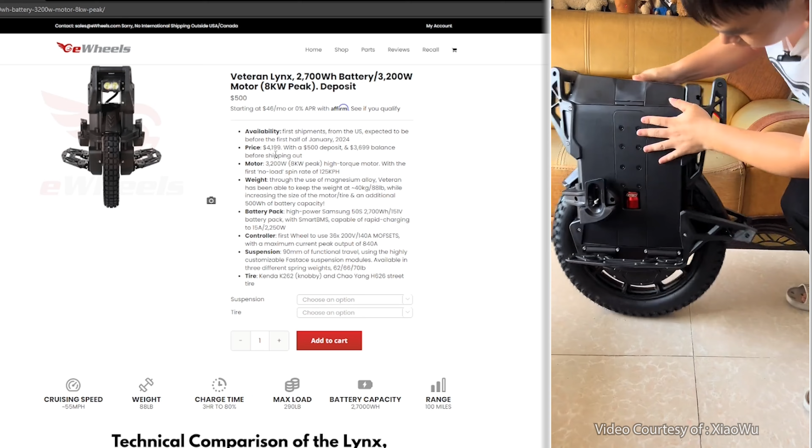So it's the Veteran Lynx. It has a 2,700 watt-hour battery, 3,200 watt motor. It's going to be available January 2024, which is only 2 months away. Price $4,200. That is a little pricey, but let's see what it has to offer. Maybe we can make that make sense.

The motor is 3,200 watt, high torque motor. So it doesn't say high speed motor, but with 3,200 watts, I guess high torque is high speed, right?

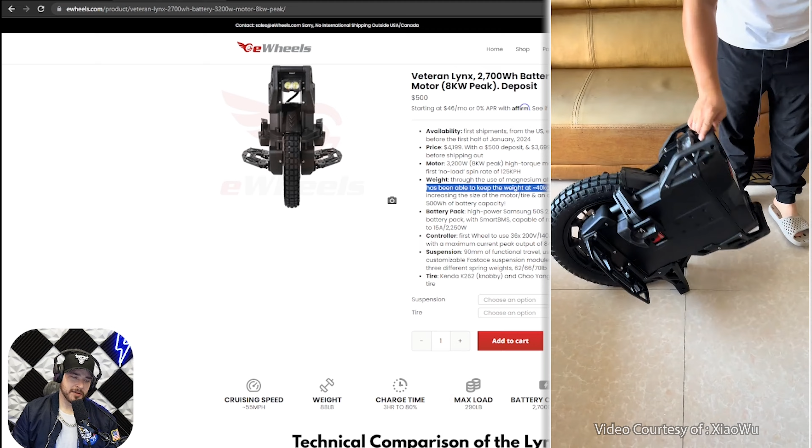The weight - through the use of magnesium alloy, Veteran has been able to keep the weight at 88 pounds. Oh, that's not bad. Whoa, is this a jumping wheel? You know what I'm saying? We got to get one to Mike Leahy and figure it out.

Battery pack - high power Samsung 50S. Yo, these 50S batteries are all the rage, so I'm glad to see it does have a 50S battery coming with it.

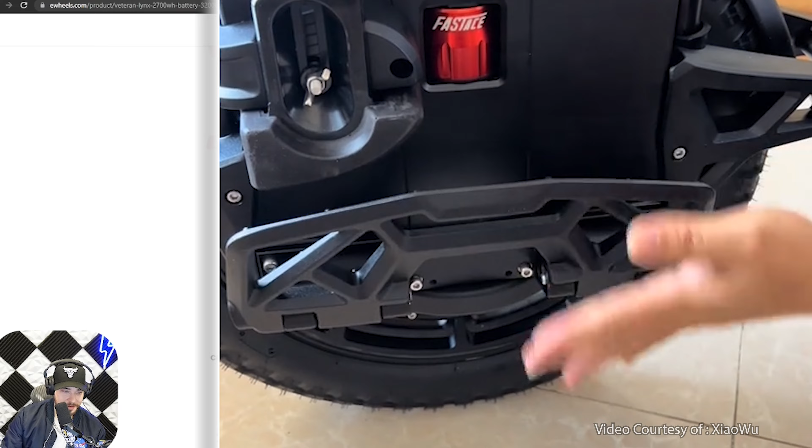Controller - it comes with... no, I'm just joking. First wheel to use 36 times 200 volt 140A MOSFETs, with a maximum current peak output of 840 amps. I don't know what any of that means.

Suspension - 90 millimeters of functional travel using the highly customizable Fastace suspension modules, available in 3 different weights: 62, 66, and 70. I'll go with 70 because I'm a fat boy, but you gotta choose what's right for you depending on your weight.

And the tire - it either comes with the Kenda K262, which I like, that's a knobby, or the H626 street tire, which is also a EUC favorite I believe for people that like street tires. I'm more of a knobby guy myself ever since the OG.

Quick stats here: cruising speed 55 miles per hour - that's pretty sick. 88 pounds, 100 mile range. Okay, oh nice, little comparison here.

Technical comparison of the Lynx, Patton, and Sherman S. So the Lynx will be even taller than the Sherman S. Would you look at that?

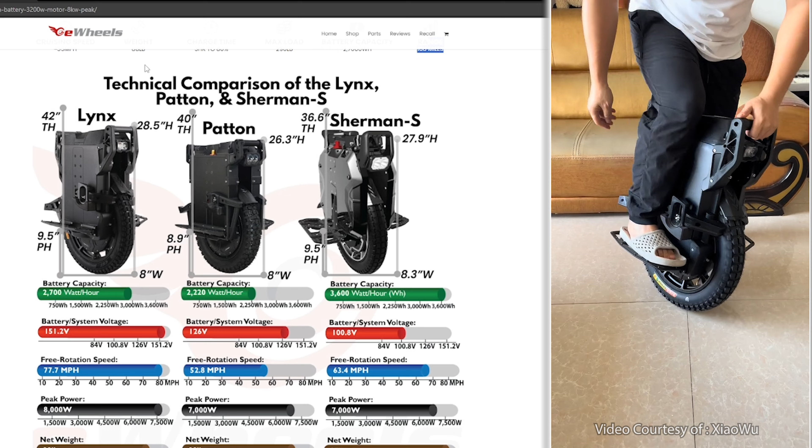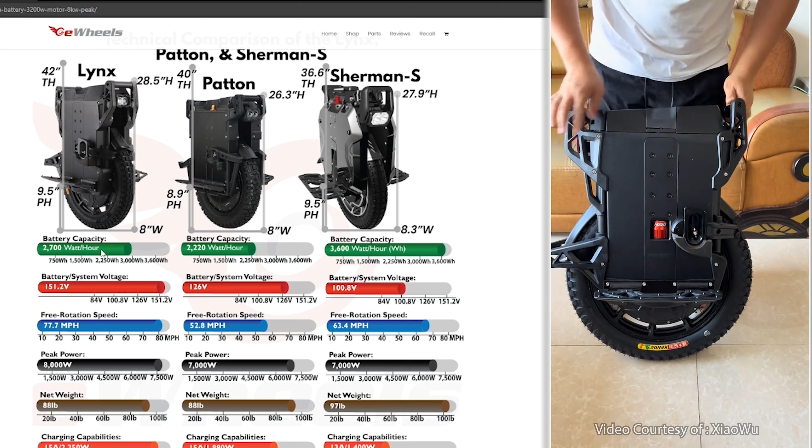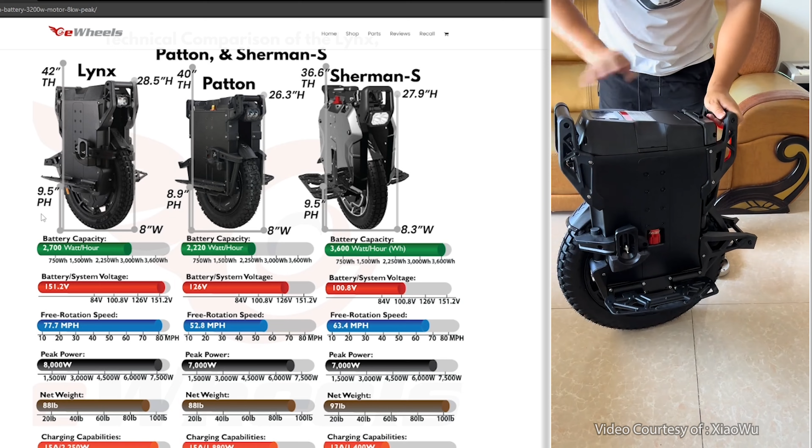Who has the better battery? Sherman S wins with 3,600 watt hours. Coming in second place, you have the Lynx with 2,700 watt hours. And last place, you got the 16-inch wheel with 2,220 watt hours. Damn, why couldn't they give the Lynx 3,600 watt hours like they gave the Sherman S? What's going on? I hope this will get me through a group ride, man.

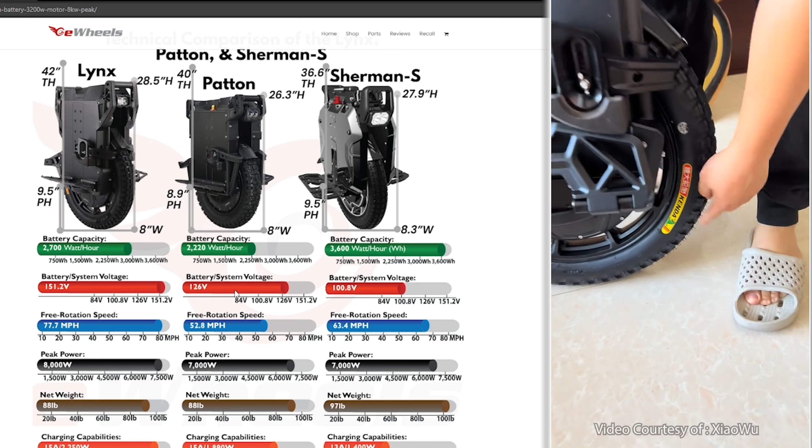Battery system voltage, 151 volts. Wow man, I thought the Patton was impressive with 126. I was like, why didn't they make the Sherman S with 126 volts? But they did much better now, 151 volts.

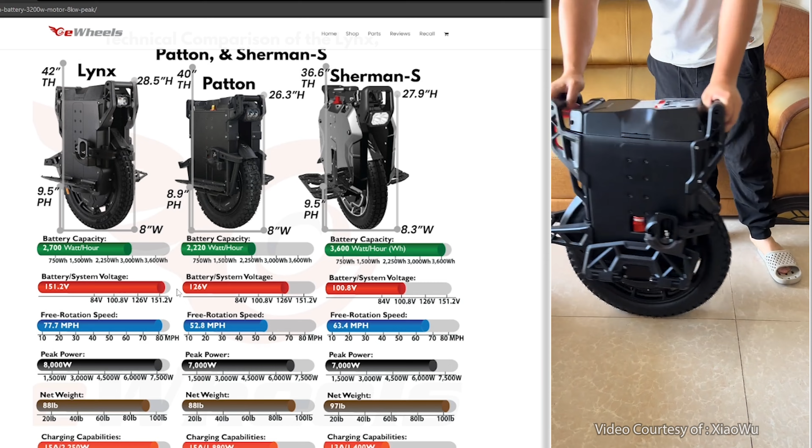With all these volts, watt hours, and amps, you might think I'm some kind of electrician or something if you hear this video. I just wanted to ride the wheel, man. I don't give a damn about the volts - it could be 5 volts. Does it work? Is it going to cut out on me?

Free rotation speed, 77.7 miles per hour. Woo, that's fast bro. They usually say you drop 10 from that, and then you could get a rough estimate of the top riding speed. So that would be 67, even though they put 55 to be safe. So maybe 60, low 60s.

Oh my God, this wheel - low 60s on a Veteran. Low 60s on a Veteran. I'm not talking about the temperature outside, baby. It's going to be sick.

Peak power, 8,000 watts - more than both of the other wheels. It weighs the same as the Patton. The Lynx weighs the same as the Patton. That's breaking news, I think. The Lynx weighs the same as the Patent.

That's pretty cool. So let's read some FAQs. How do they already have FAQs? This wheel just came out.

Someone asked, how does the Lynx fit into the current Veteran product lineup? While the 2,700 watt-hour battery pack of the Lynx might come as a slight disappointment for those seeking a high-performance iteration of the Sherman S, the Lynx bridges the gap between the Patton and the longer-range Sherman S, featuring a considerable boost in performance, torque, power, and speed, along with a 22% increase in battery capacity. With the physical constraints of the metal casing, a 2,700 watt pack was the largest size that could be accommodated in the design.

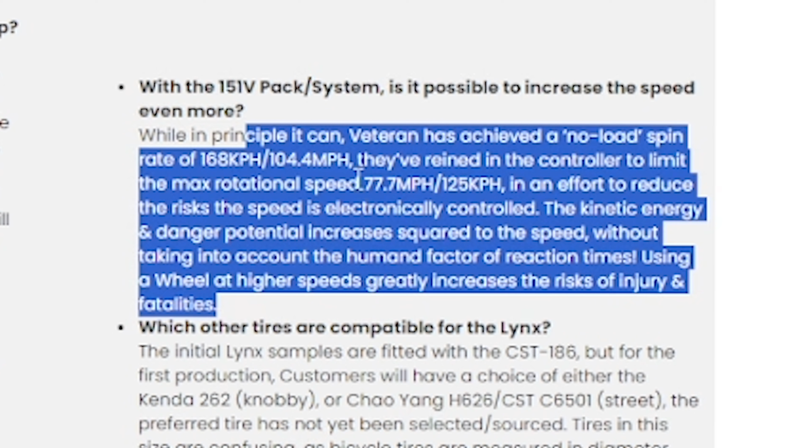My whole thing is, why would they bring it back down to 77 if it was at 104? Because if somebody rides at 80 miles per hour - I know you got to be out of your mind - they're just going to cut out and die when they could have possibly rode that. I don't know, that's weird to me.

Oh man, which other tires are compatible for the Lynx?

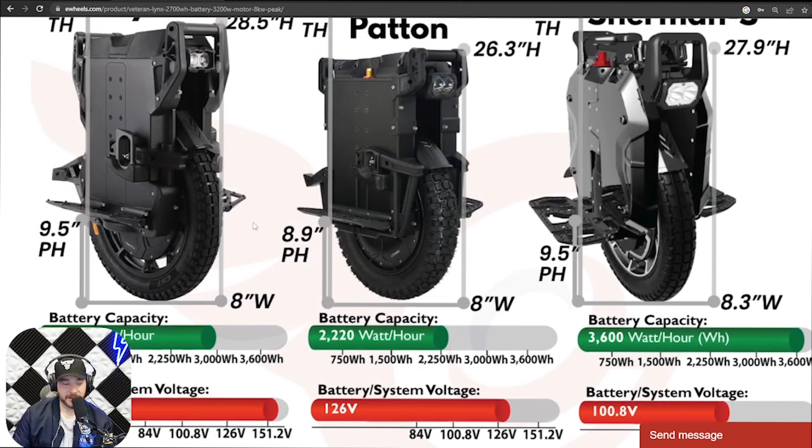Okay, let's check out some stats. Anything we didn't go over on the website? I don't believe so.

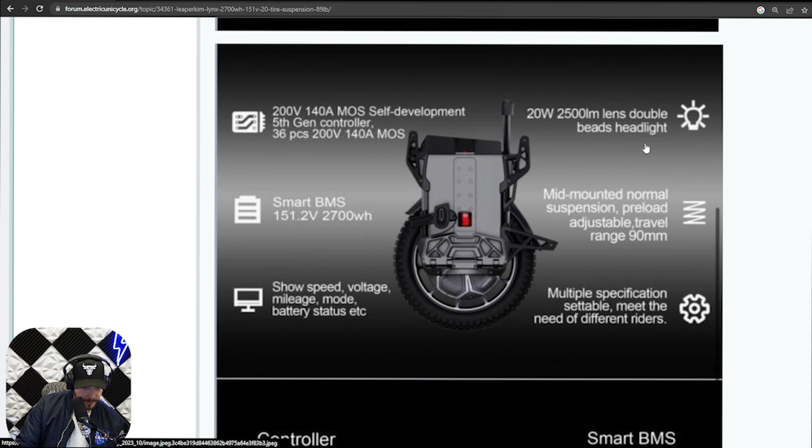A 20-watt, 2,500 lumen lens, double beads headlight. That sounds pretty powerful, but we'll see, turn that thing on, see how it looks at night. First time I get it. Mid-mounted normal suspension, preload adjustable, travel range 90 millimeters.

All right, guys, well, let's hear about this controller. The controller is a double-layer modular design using aluminum plate to dissipate heat, copper bars and columns to accelerate conductivity and dissipate heat. 36 MOSFETs withstand 200 volts and 840 amp current. The new Gen Smart BMS supports dual direction communication between controller and BMS, inspecting voltage of each series, comprehensive protection against overcharging, overdischarge, overload, short circuit, high temperature, etc.

Damn, that Smart BMS is pretty smart. And that's what I want. I want my wheel to be as smart as possible. Smart enough not to turn off. Actually, it could be pretty dumb, but it just needs to be smart enough not to explode and not to cut out. That's all I really ask for. You don't gotta be that smart for that, right? Come on, man, let's do your job.

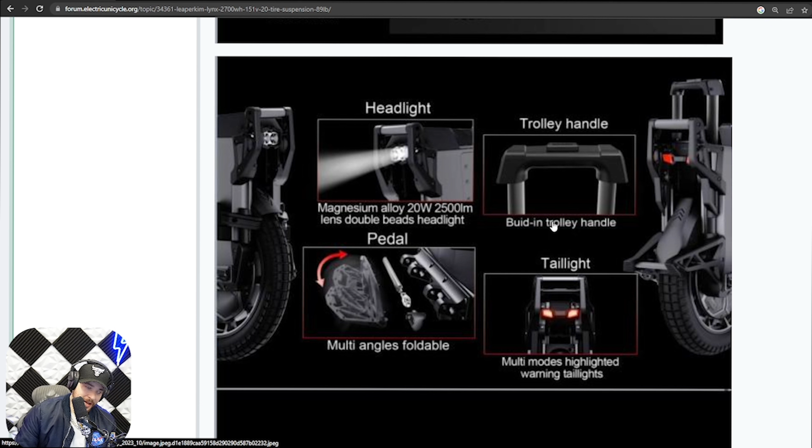The headlight, magnesium alloy, 20 watts. The taillight has multi-modes, highlighted warning taillights. The trolley handle is built in - as opposed to a not built-in trolley handle. Look at that parking stand. Looks pretty legit, pretty robust.

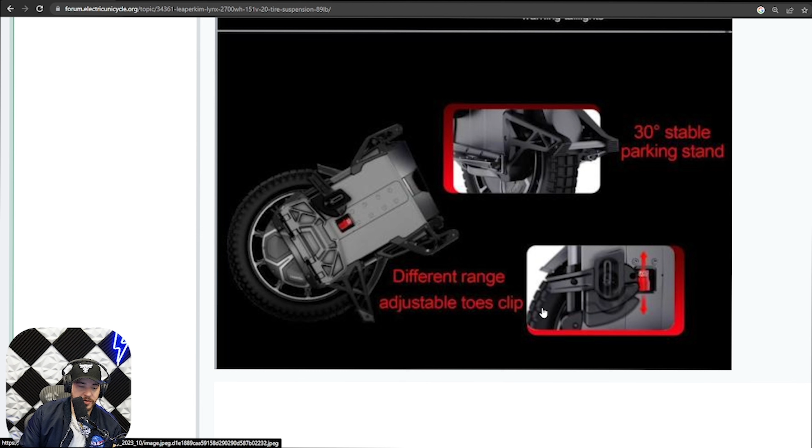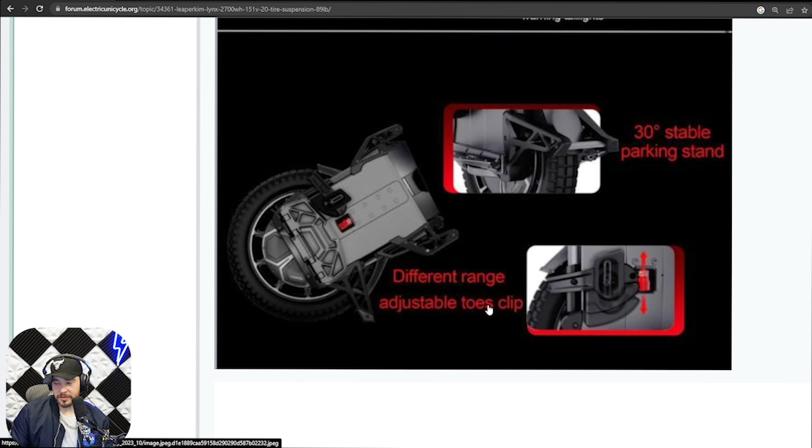Different range adjustable toe clips. That's pretty cool too. Some guys take them off, they like throwing some Clark pads, some Grizzly pads on there. But I'll see when I get this wheel - oh yeah, by the way, I am getting this wheel. Maybe I'll take them off, maybe I'll keep them on. Who knows?

Man, guys, this wheel looks amazing. It looks very similar to the Patton, but it got the trolley handle in the back over here. Just like an amazing wheel, man. Because the patent already looked perfect, but I don't want that little wheel, man, I need a big wheel.

I need an 18-inch. Meep says, what exactly does 18-inch mean here? Is it a 12-inch rim like the Patton, which is often called 18-inch, or like the Sherman S? No, Sherman S is like the Sherman, that's 18 inches, and this wheel is 18 inches too. And the Patton is a 16-inch wheel, just like the V12 and the Nikola. I know there's a lot of confusion, but I'm glad that I just ended all that confusion right now. So if anyone needs to timestamp this and send it to a friend, we figured it out - the inches.

Am I right? People are talking about it. No CGI yet, no rush. Any new wheel leaked or announced now won't be available until 2024.

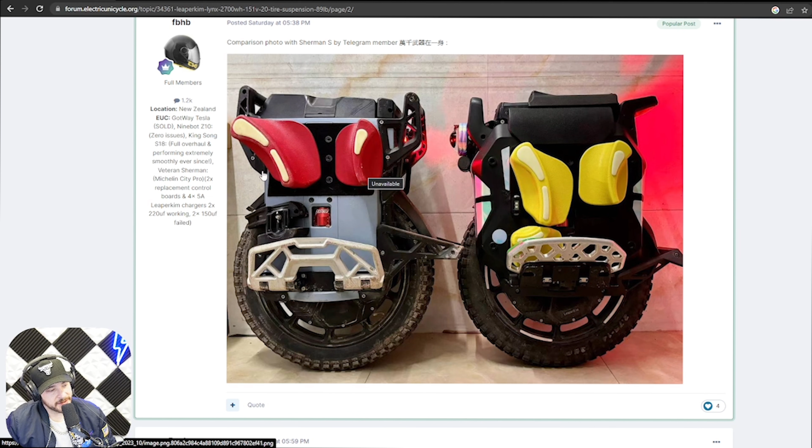A little bit taller, like the stats showed. Is the rim similar? Looks very similar, about the same spacing and all that. Wow, the body's slimmer, like not as wide. Cuts off here and here, so it takes in like 2 inches on each side. Pretty dope, pretty dope. Guys, I will scour the whole internet.

This is EUC Vibes, okay? If there's something to be known about this wheel, you're going to find it out in this damn video right now. I promise you. In my country, many people don't even commute more than 45 minutes in their cars, let alone on an EUC.

What's true? Average speed that one can achieve in normal life with other traffic, etc. Who can go 90 for extended time? Not many. It's always lower. That fact alone extends the battery use a lot.

There is the Sherman S and the EX30 for long range, so those buyers are covered. And probably within 1 year, they'll update the Sherman. For people needing 3,600 to 4,800, the Lynx simply is not it. Sorry guys, I'm horrible at accents.

Oh, Jason, we got Jason, the CEO of eWheels in the chat. Oh man, what's up, Jason, on the forum? He's giving us updates. This was posted on Sunday.

He says this morning's Lynx update: Leaperkim has 20 pre-production models completed. Wow, they already built 20 of these Lynxes. That's a lot of Lynx. You can build, it's about 20 Lynx right here.

Shipping out this week to freshly charged Coogee, Marty, New York City, Sean, Ronan, and the rest are allocated for testers in China.